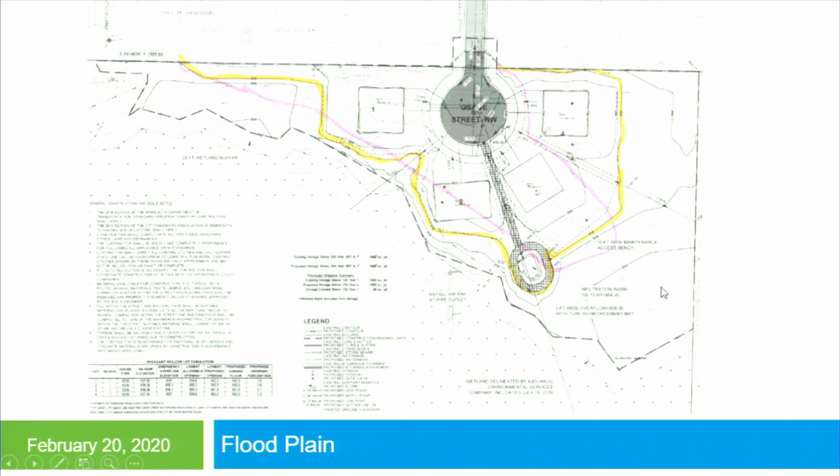Essentially what they're doing, in non-engineering terms as I understand it, is increasing the flood capacity in this area, and some here, and again some up here, to make up for the fill they're bringing in to create the building pads. They've been working with the Coon Creek Watershed District and the city engineering department on this, and this is the concept that they came up with and is what's being proposed.

This is really the utility plan. It's pretty straightforward. They're bringing sewer and water in from the stub street, and each house will get its own service off of the cul-de-sac.

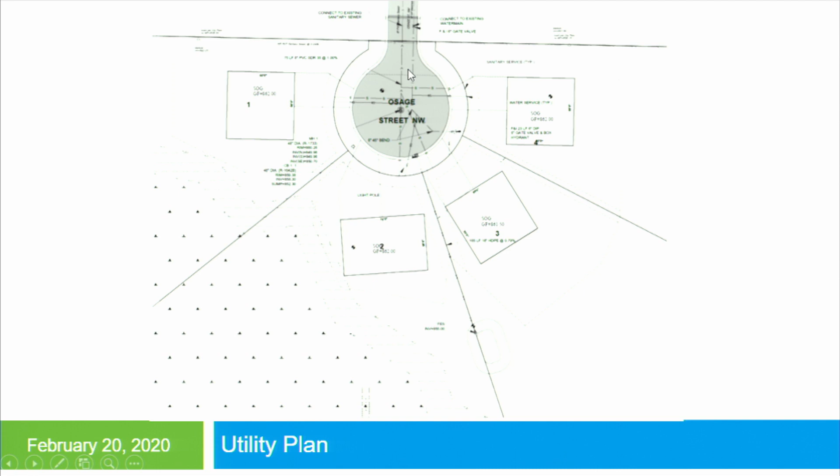At this point in time, city staff, primarily from the Parks and Rec and Public Works Department, are in discussions with the applicant about a trail easement across the north boundary of the plat. There is a 30-foot wide drainage and utility easement through here, so the possible 20-foot wide trail easement would be on top of that drainage and utility easement.

To reflect the ongoing discussions between city staff and the applicant, in the recommendation, city staff is recommending that condition number 4 be modified to read: park dedication requirement to be met prior to releasing the plat for recording. There are really 2 options available: the cash dedication for the 4 lots, or the trail easement across the north boundary of the plat.

With that, staff is recommending the proposed preliminary plat for 4 single-family residences with the conditions outlined in the staff report, with the modification to number 4, and modifying condition number 3 to read the existing garage and house be removed prior to the issuance of the building permit. And with that, I'll answer any questions.

I believe the applicants are in the audience to answer questions. Thank you, Mr. Harlicker. Commission, any questions for Mr. Harlicker?

There'll be an opportunity for public comments. What was the language for the change in condition number 4? Like everything after 'met' -- park dedication requirement be met prior to releasing the plat for recording.

And as far as the actual lot development, is the wetland delineated line where the turf would stop, or turf development of the house itself -- how far into those wedge lots are they going? The wetland buffer is 25 feet in from the edge of the wetland. Engineering department does require that those areas be left natural and signed as wetland buffer area.

So that heavy dash line would be the demarcation where lot development would stop for turf? I believe that the heavy dash line there is where the erosion control will be installed. Okay, thank you, Mr. Chair.

Commissioner Casey: So, Mr. Harlicker, that 20-foot trail easement, that's not gonna be paved or anything? And is it gonna correspond to what was a driveway or essentially the entrance into that house and garage back there? At this point, there are no plans -- this is just looking ahead to the future. The future trail development along there would be a separate Parks and Recreation and Public Works project. So at this time, they're just looking at getting that trail easement that would allow future trail construction.

Okay, because there's nothing really east or west of there that would correspond to a trail -- it's just that one section? They are looking at the trail coming from over here, across through here, wrapping around this wetland, then extending across over to 121st at this point. So in the future, eventually it would connect Main Street with Lions Park.

Yep. Okay. And I know you said they're going to be slab with no basement. Is there a price point for those houses? Are they going to relatively equate to what's already currently there, or does that matter at this point? Chair Schwartz, that's really up to the applicant. That's not something this commission has any say in. Okay.

Chair Schwartz, if I might. Yes, sir. So the recommendation from staff

is that the commission simply adopt a recommendation from us that park dedication be met. That's because city ordinance gives the city the choice of whether the applicant is required to pay money or the city will designate land. So while I can appreciate all the concerns raised about the location of the trail and things like that, and it sounds like there's discussions ongoing, the reason our recommendation is that park dedication be met is so those talks can continue.

We don't want to figure that out tonight, and that's the point. Thank you. Okay, thank you. Anyone else wish to speak at the public hearing?

Hi, my name is Greg Robick, and I reside at 12158 Quinn Street Northwest. Our property butts up against this pond that's in the northern northwest quadrant of that. Is that pond, is this new property going to go right up to that pond?

Chair Schwartz, that pond will be right up in this corner here, so that'll be located on Lot 1. Okay, so their property will butt up against that pond? Yes, it will. As far as the trail, I think it was discussed a little bit, the trail that's going to go along there for this property is going to be, I'm assuming, raised up. It's going to be a lot of fill going in there. And you said that the drainage is going to go away from these existing houses?

Correct, because our backyard, over the 30 years we've lived there, the back half of my backyard has sunk. And there's water 3 feet down. So I'm just concerned that this area is going to be built up, and is more water going to come into my property? Yeah, Chair Schwartz, the development is over in this corner here.

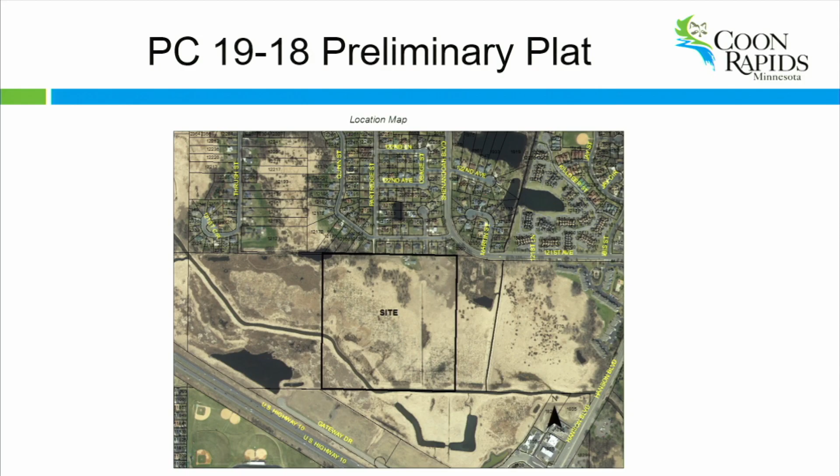The pond that is being referenced here is this little sliver up in this northwest quarter, probably 900 to 1,000 feet away from where these houses are. So the drainage from this area here with the construction area won't impact that far corner of the 40-acre parcel.

Okay, well I had other questions with the trail, but that's not about what this is, so. All right, thank you. Thank you. Anyone else wish to speak at the public hearing? Last call for the public hearing. Seeing none, we'll close the public hearing.

Commission, your thoughts? Mr. Chair, Commissioner Schmolke. That's okay. So clearly there's a lot of questions and concerns about this easement and so forth, and I'm just wondering about park dedication, is there going to be some sort of communication shared with the residents in the area on any outcomes or decisions, or will they be a part of this at all, or is this purely going to be between the current property owner and the city if we approve it the way you're suggesting?

I don't know about the communication side of things, that's not my bailiwick, but as this group knows, this will go to council in a couple of weeks. Okay, I expect that this will continue. Or is this a recommendation? So the residents would have a chance to attend the council meeting, which is what I was trying to get at, so it's not a closed issue tonight for them, they can hear more about it at the city council meeting when it's brought up again.

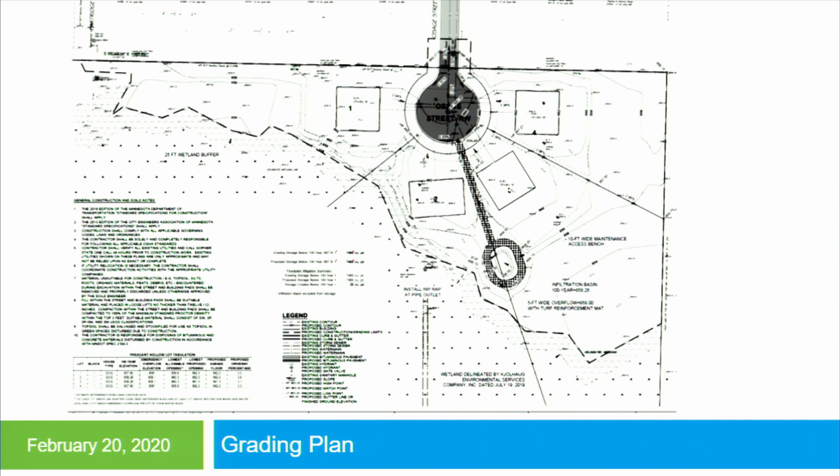Thank you. Commission, anyone else? Mr. Chair, Commissioner Heikkila. I'm still a little perplexed—I don't quite understand this number 4. If you say park dedication requirement prior to release, is that not almost saying it will be a park dedication when it hasn't yet been determined whether it will be a park dedication fee or a parkway through there?

Yeah, Commissioner Heikkila, the proposed language is meant to be open-ended, leaving both options available—whether they pay the $2,000 per lot to meet the park dedication fee, or provide the 20-foot wide trail easement to meet the park dedication. I wonder if that shouldn't be reworded a little differently. I'm open to suggestions. I'm not the expert on how it should be worded, but it seems to me like it's locking us into the park dedication fee rather than leaving it as another option.

Commissioner Heikkila, those are really the two options available. My intent is to make sure the park dedication requirement is met either through one or the other, without being specific to either one. Okay, I'm fine with that as long as that's clearly understood. Okay, that's what it is.

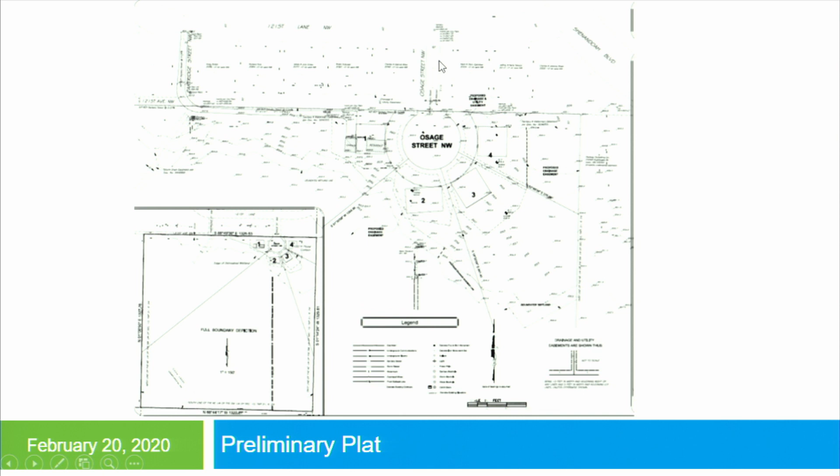Okay, great, thank you. Mr. Hardiker, would there be a stop sign or anything there coming out of that Osage cul-de-sac where it meets 121st Lane? At this point, I don't think that decision has been made yet. It certainly is an option. Okay. No, that won't be, it's not traffic. It's not part of this plat. Gotcha, thank you.

Anyone else? Do we have anyone ready to make a motion? Mr. Chair, I'll move approval of planning case, where'd it go? 19-18, preliminary plat Pheasant Hollow at 21031 Partridge Street, with the following items.

Compliance with Title 11, all engineering comments be addressed as described in the attached memo dated February 4th, 2020. The existing garage and house be removed prior to the issuance of any building permits. The park dedication requirement be met. One street tree is required per lot. The trees must be a minimum caliper of 2.5 inches. A developer's agreement be entered between the city and the developer.

Mr. Chair, on number 4, Commissioner Geisler, there was something at the end, park dedication requirement be met prior to being released for recording. Mr. Chair, I would accept a friendly amendment to that statement. All right, and I would second that motion. We have a motion by Geisler, a second by Casey. Any further discussion?